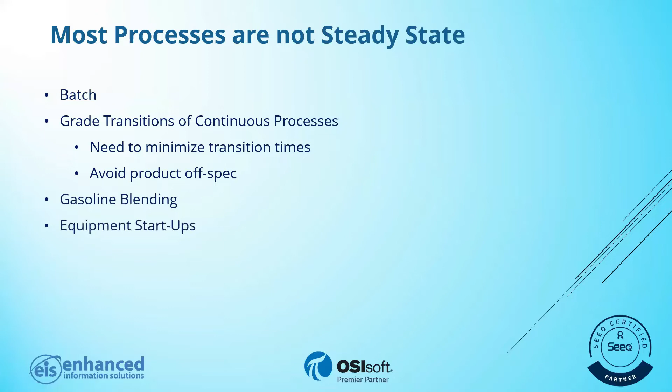Blending operations, gasoline, equipment startups, paper machine startups, turbines - any kind of complex piece of equipment, you have certain profiles you need to adhere to. And in the T&D industry, any kind of load transitions - if you bid up to the ISO, you have your bid up and bid down rates on the power you're going to provide onto the grid. Those transitions, those load changes, are by definition nonlinear.

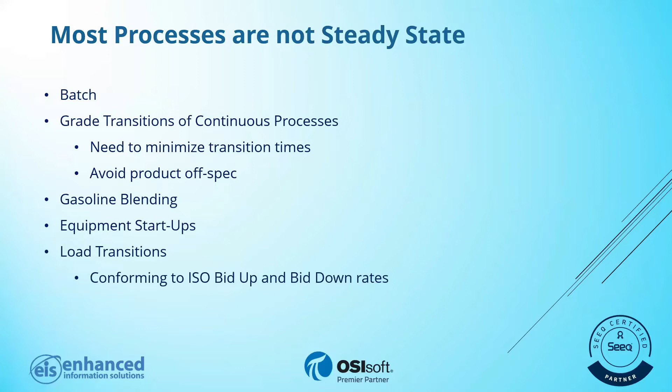Okay, now SEEQ is used to identify these conditions using SEEQ capsules. And what I'd like to do now is hand this over to Joe to describe SEEQ.

Thanks, Jack. So yeah, it started off - if you look at the process data journey, it started off really with pen and paper recording data. And as the PI System and other databases became present in the past couple of decades, you started actually saving that data and capturing it electronically and automatically. However, we've generally run into having to struggle with spreadsheets and other things to wrangle that data and get it into place for any sort of analytics. And it's not really meant for time series analytics.

So SEEQ came into the market back in 2015, 2016 to solve this problem - to connect to the data directly, to enable advanced analytics, and bring in even ML and AI on top of those data sets to automate that process for the end users.

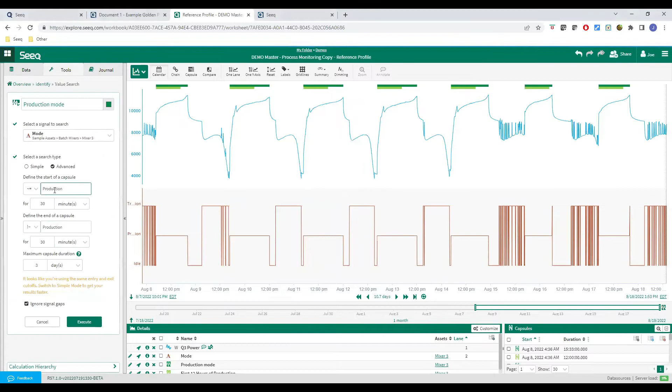However, you can also define these in SEEQ. So in this case, we have taken the production time frame and just said, let me find when that production time frame is happening, and created this capsule, as we call it, as an event inside SEEQ.

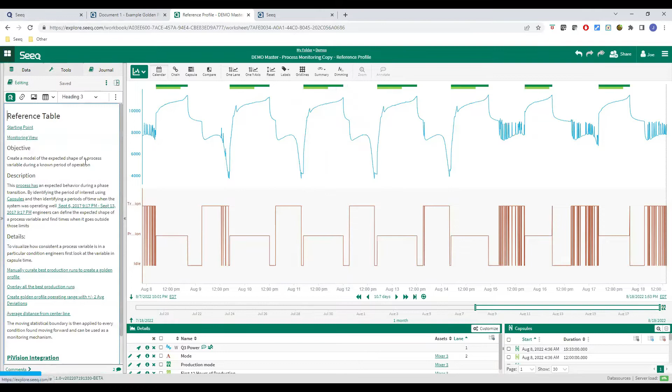Now, whenever this is happening, we want to then take those profiles and say, which are the best ones of those particular profiles that we're looking at? In this case, you can select these in a variety of different ways. It's up to the end user to decide how they want to select which batches or runs or grade transitions are their best ones that they want to focus on.

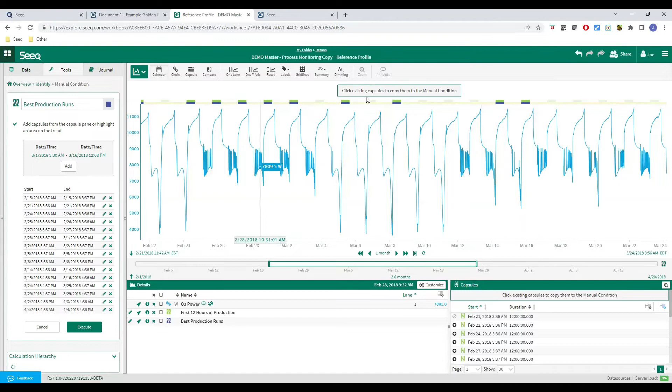You can do this either manually, as you can see here, where they actually just selected the particular capsules at the top of the screen that they were interested in. Or you could do this programmatically by taking the ones that have above a 90% yield or above 95% quality, whatever it may be, that you can give context through a LIMS system or something like that.

We then want to take that data and overlay it to see what the profile looks like in relative time. So we can use our capsule time view inside SEEQ to see that profile overlaid, and we can use that to build our golden profile.

So as I mentioned, this reference profile tool is what we use to create this golden profile. So we select the signal, the runs that we want to use, and we select the statistic, in this case the standard deviation, multiplied by 2 to create the upper limit.

We duplicate that with a -2 multiplier to create the lower limit, which is the bottom red one there. And then the average, which is this dashed line here, is going to be just a different statistic that provides that data in real time. So you're going to see that kind of target of where you want to aim for as you're going along in the process.

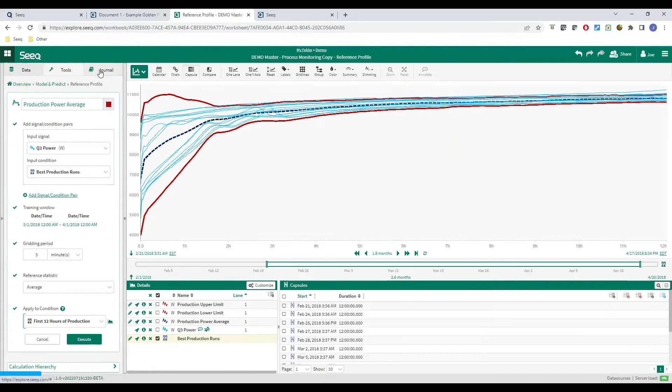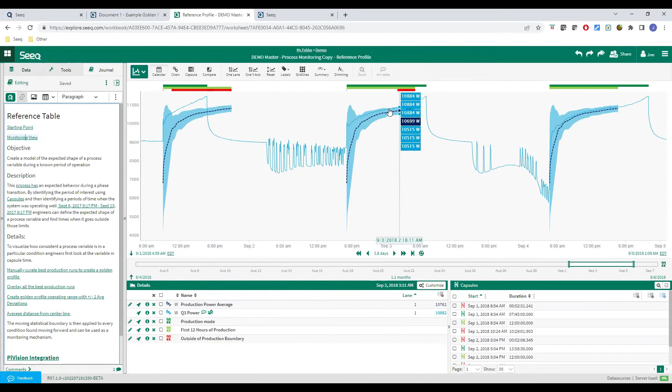And this can be turned onto a monitoring view of some sort. So if you want to see the data as it's coming out, or looking back historically with the boundaries and the target against your actual signal, and flagging any sort of deviations you may have along the way. You can also add some statistics, like the distance away from the target you're aiming for, or root mean squared error, things like that. You can start to add those different calculations inside SEEQ as well.

Once you finish whatever visualizations and calculations you want to add to the graphic, that's where we typically flip over to our SEEQ organizer, which you can see an example of here on this tab. So you may have an overview looking across all your different pieces of equipment and seeing where the deviations are happening. And you may have some details as you go along, like looking at the last week and showing you where those deviations are, having a table that counts how many deviations, how long, gives you the root mean squared error, some visualizations of how much time is spent deviating, and just some details as to what's happening underneath the scenes for each of these different processes. So these are just some different ways that you can visualize it.

And with that, I'll pass it back to Jack and Anu to show the engineered solution.

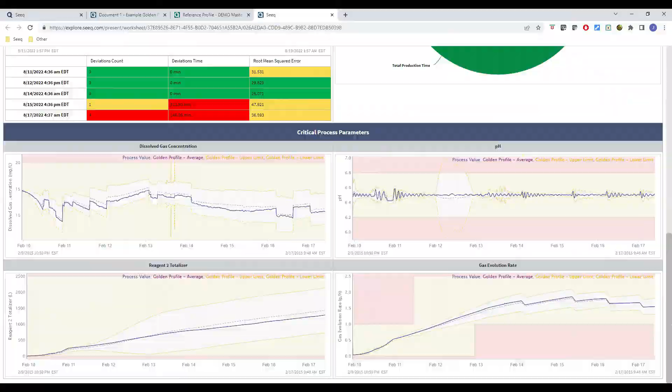Okay, well actually there is a quick question here. It comes up as, how are you determining which batches to use? Can you connect to a LIMS system or a customer database? How are you determining which ones to use?

Yeah, so it's completely up to the end user as to which batches they want to use. But typically what we see is connecting to a LIMS system and bringing that data in to help filter the batches for what you want. So whether you want to track for best quality, best cycle time, best yield, those may be different ways to select which batches you care about. But you can do any of those type things inside SEEQ to filter down which batches you want to use to train it on.